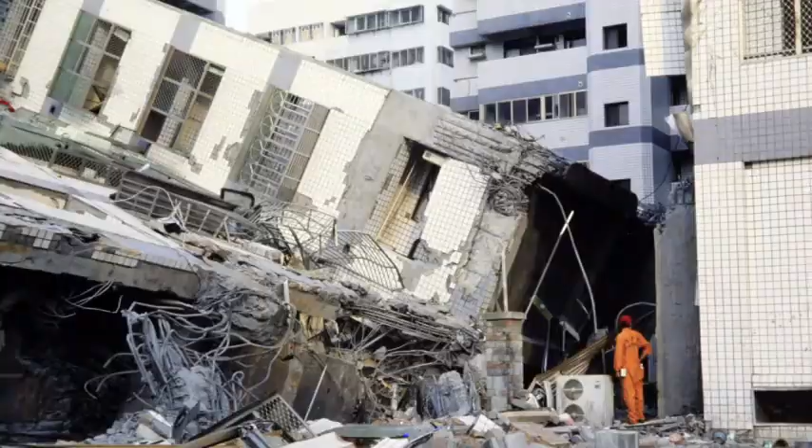While earthquakes can easily cause massive loss of life and property within a very short time, even today there is no entirely accurate way of forecasting when and where earthquakes will strike. Because of this, earthquakes can be considered random killers.

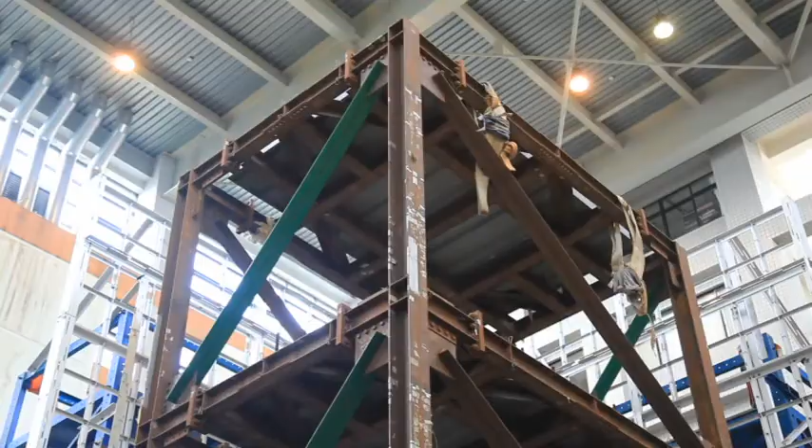Although we cannot stop earthquakes from happening, scientists and researchers are still working tirelessly in hope of making breakthroughs in forecasting earthquakes and mitigating their damage, and together help build an earthquake-proof, sustainable homeland.

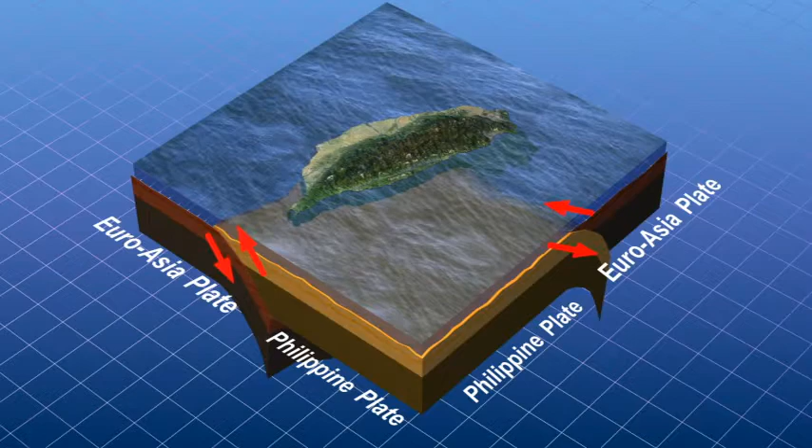Located at the junction of the Eurasian and Philippine sea plates, Taiwan is the site of intense earthquake activity. As a result, the government of Taiwan has been paying close attention to ways of alleviating loss of lives and property by preventing the destruction of buildings in earthquakes.

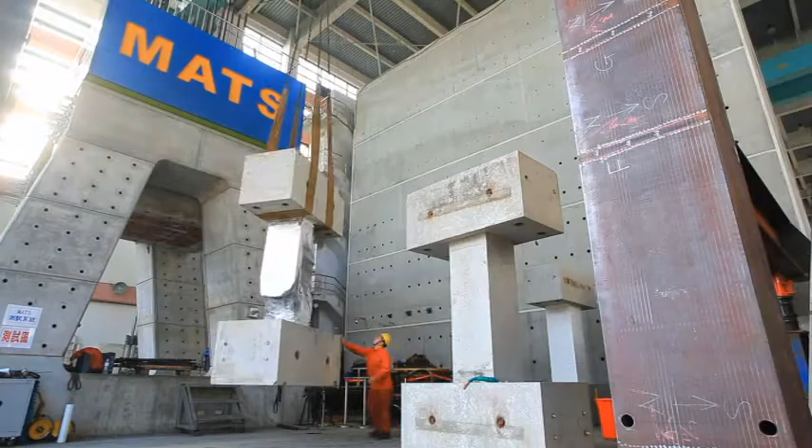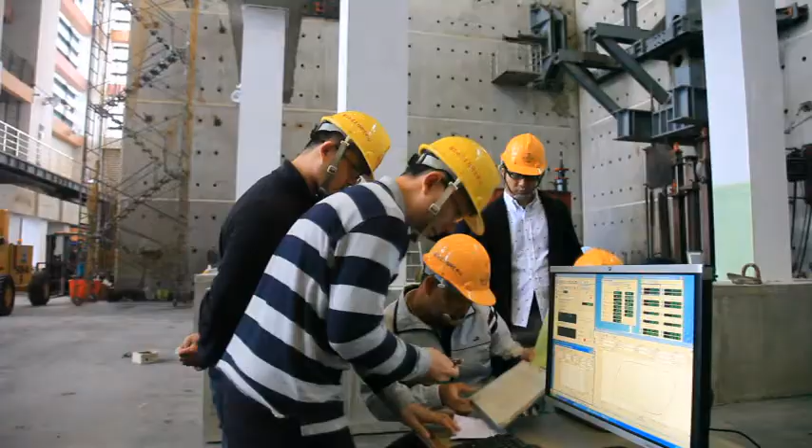In order to overcome bottlenecks in earthquake engineering research and take the domestic earthquake engineering research to the next level, the National Science Council of the Executive Yuan established the National Center for Research on Earthquake Engineering, NCREE, in 1990. Researchers at NCREE employ the results of large-scale, quasi-static and dynamic experiments to verify theory and effectively reduce the damage caused by earthquakes, safeguarding the nation's economic achievements.

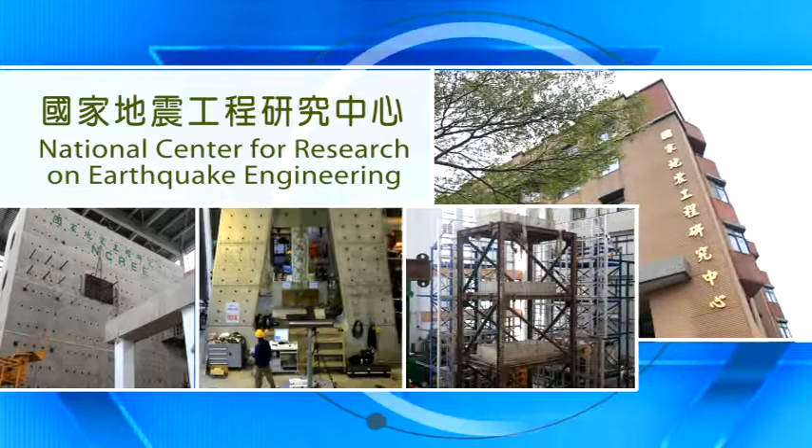The National Science Council established the National Applied Research Laboratories, NAR Labs, in June 2003 for the purpose of strengthening the operational flexibility and efficiency of the nation's research units. NAR Labs assumes control of all national laboratories, including NCREE, which has continued to carry out its crucial mission of earthquake disaster prevention in Taiwan.

NCREE's main missions currently include establishing and providing experimental facilities and earthquake engineering databases, leading the development of seismic design codes, bridging between academic and industrial sectors, playing the role of coordination and integration, leading the way for the innovation of seismic technology, and spreading and popularizing seismic knowledge.

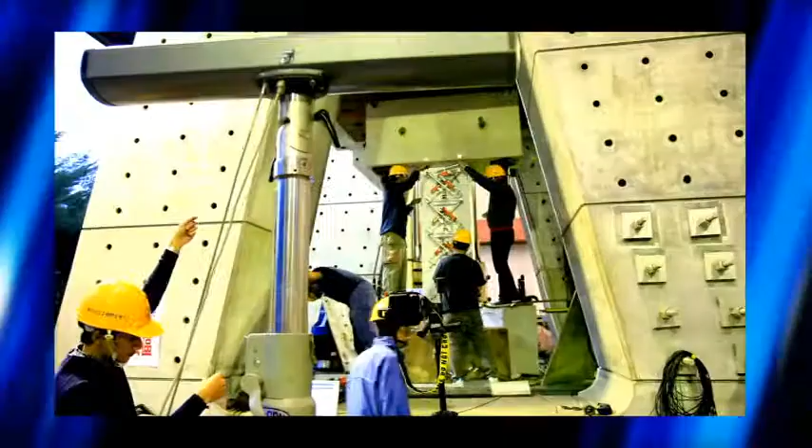In order to accomplish its missions under the leadership of the Director General and 2 Deputy Directors General, NCREE has established separate administrative support and specialized technology divisions, while also making flexible adjustments in accordance with emerging research needs so as to achieve the best effectiveness.

NCREE's Earthquake Simulation Laboratory possesses experimental facilities meeting the highest international standards, including a seismic simulation shake table, reaction wall and strong floor, and multi-axial testing system.

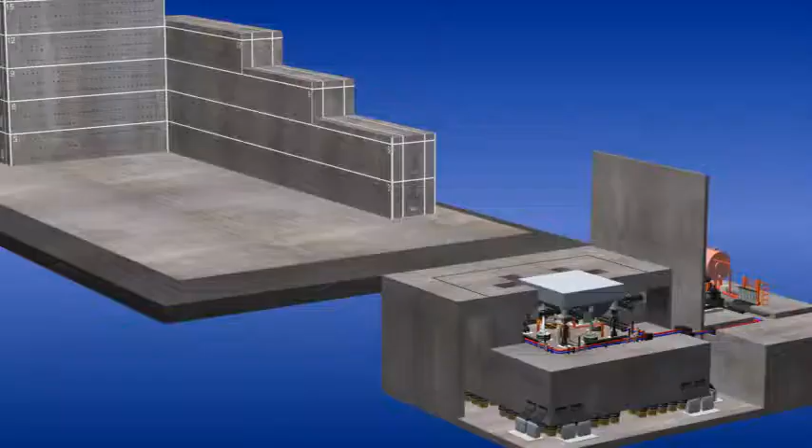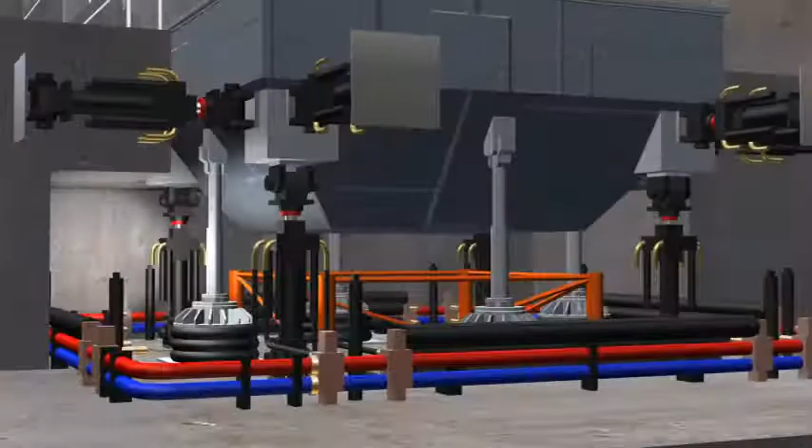Seismic Simulation Shake Table. The Seismic Simulation Shake Table has 6 degrees of freedom and can simulate major natural earthquakes as well as artificial earthquakes. With dimensions of 5 meters by 5 meters, the shake table is capable of carrying a maximum payload of 50 tons and is driven by 12 actuators along 3 axes.

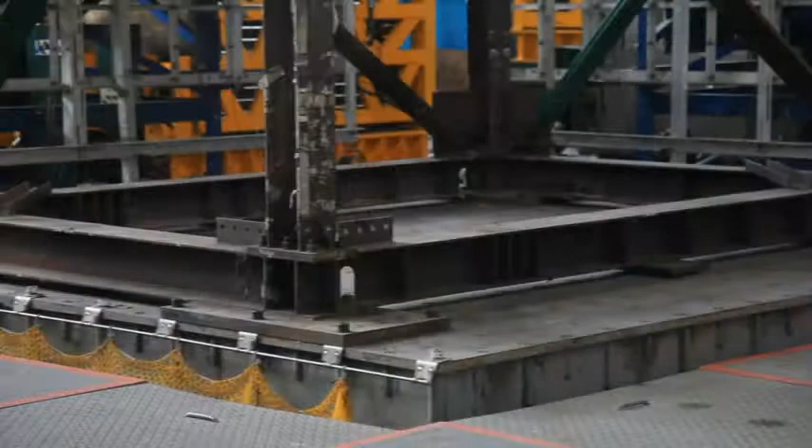The shake table is secured on a reaction mass block weighing 4,000 tons. 96 air springs and 80 viscous dampers make up the isolation system to separate the table from the laboratory foundation and keep the laboratory structure free from the shake table vibrations.

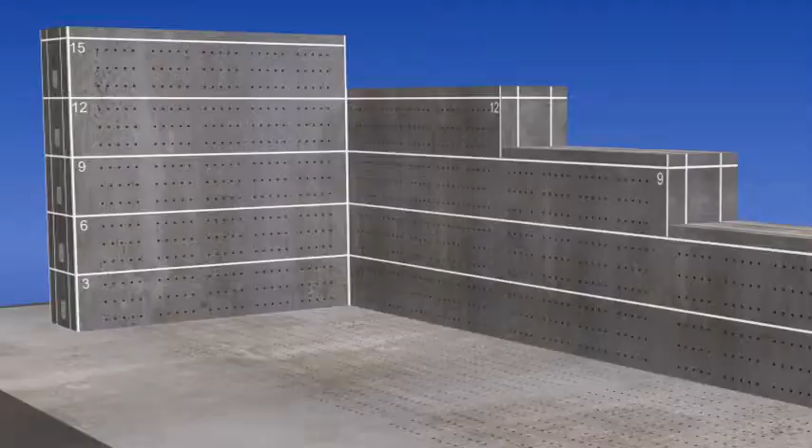Reaction wall and strong floor. The reaction wall and strong floor experimental system can perform quasi-static monotonic or cyclic loading and pseudodynamic testing of large or full-size structures. The reaction wall is used to secure the hydraulic actuators and provides the reaction needed on structural tests. L-shaped in plan view, the reaction wall system has a cell-type construction and features a unique artistic design with wall heights varying from 15 meters, 12 meters, 9 meters to 6 meters.

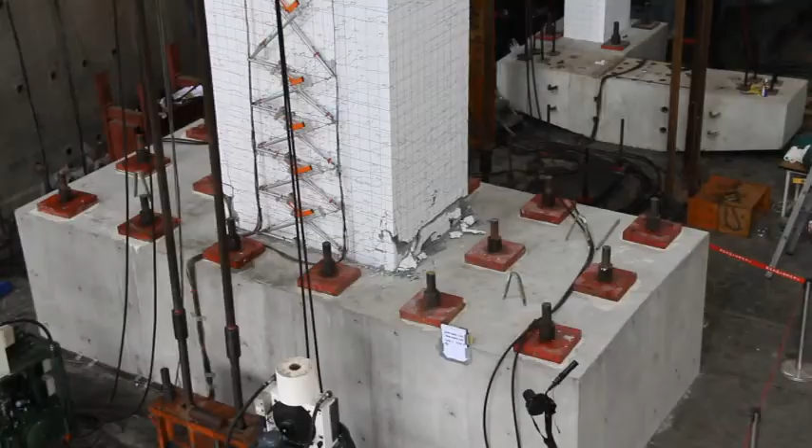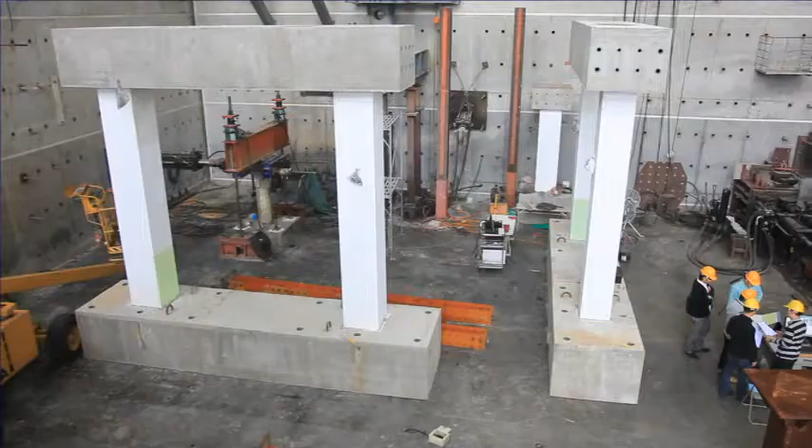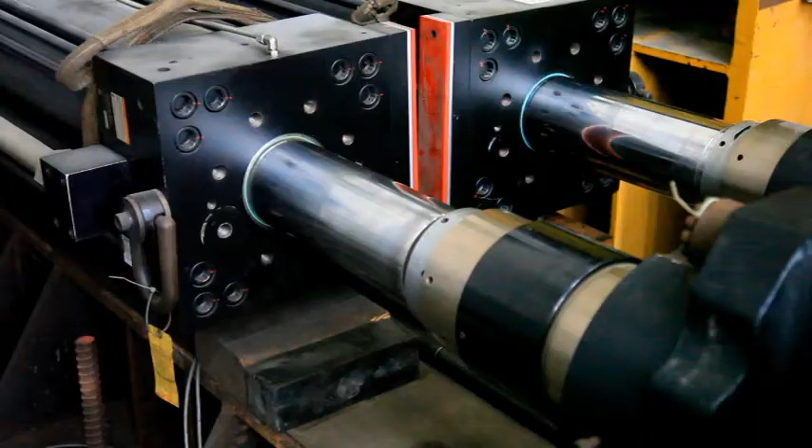The strong floor is mainly used to mount the structure specimens. It has a reinforced concrete construction and dimensions of 60 meters length, 29 meters width, and 1.2 meters thickness. In addition, a testing system for energy dissipating elements is provided to perform dynamic cyclic loading tests on energy dissipating elements. The facility is fully able to support seismic performance verification, code development, R&D of new generation technologies, and construction methods in industrial, governmental, and academic sectors.

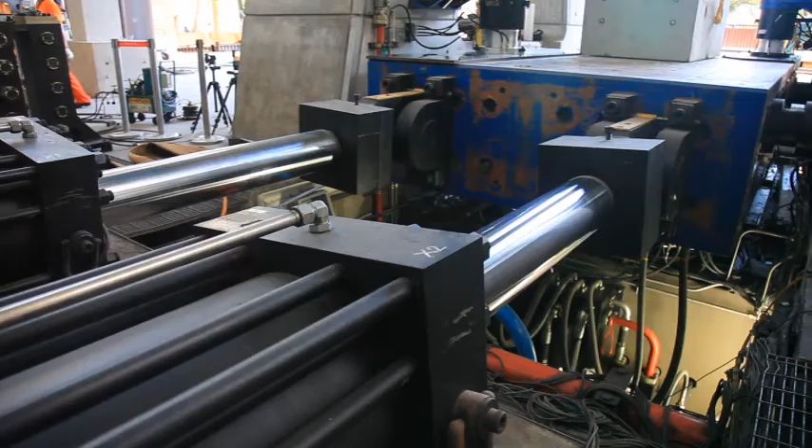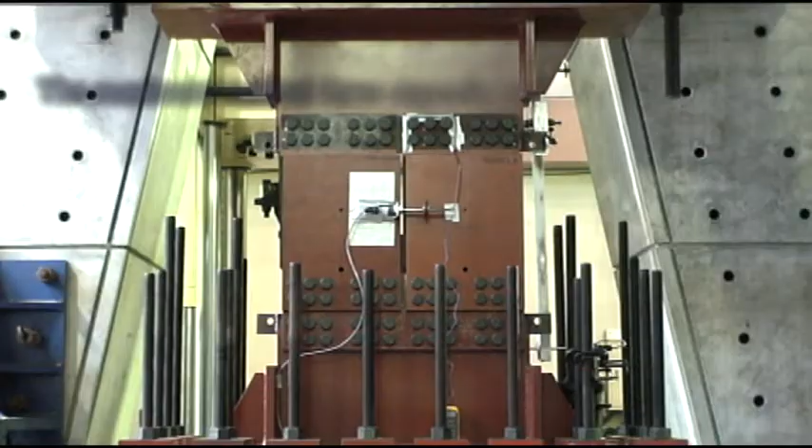Multi-axial testing system, MATS. MATS is a structural testing system with 6 degrees of freedom, capable of applying vertical loads, lateral loads, transverse loads, as well as bending moments in all 3 directions. The maximum vertical force capacity is 6,000 tons. The maximum horizontal displacement is plus or minus 1.2 meters. And the maximum horizontal tension compression force capacity is 700 tons.

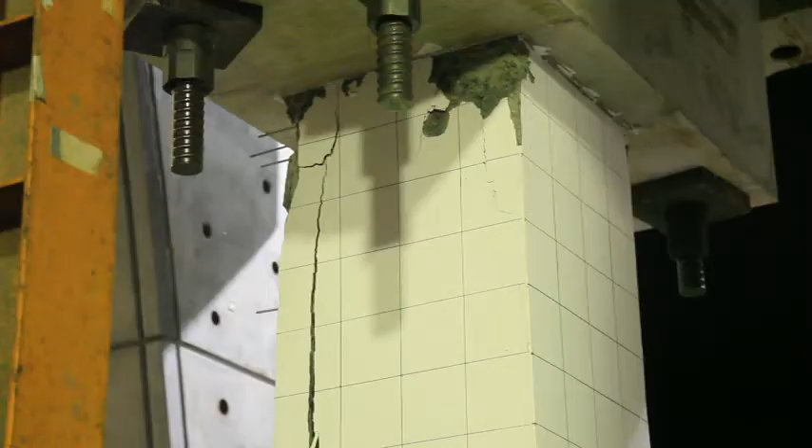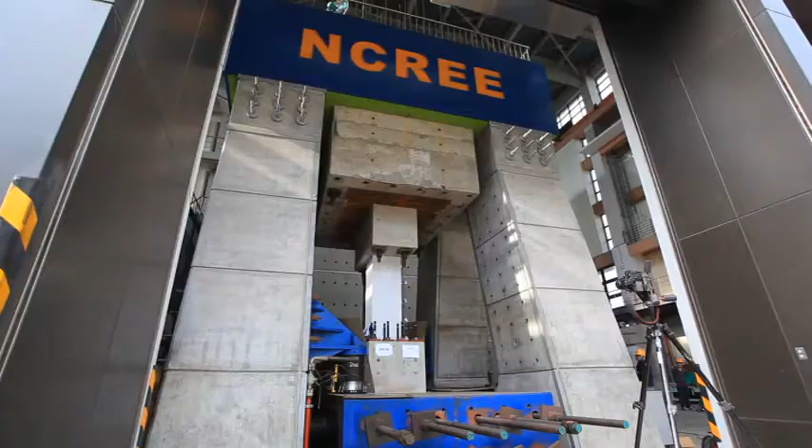In comparison with equipment used in the past, this system can simulate an even wider range of structures subject to actual forces or deformations. The system can be used to test many different types of structural elements and subassemblages. NCREE's Earthquake Simulation Laboratory and Calibration Laboratory have both passed ISO 17025 certification, and its Earthquake Simulation Laboratory has also passed ISO 9001 certification, assuring the quality of earthquake engineering experiments.

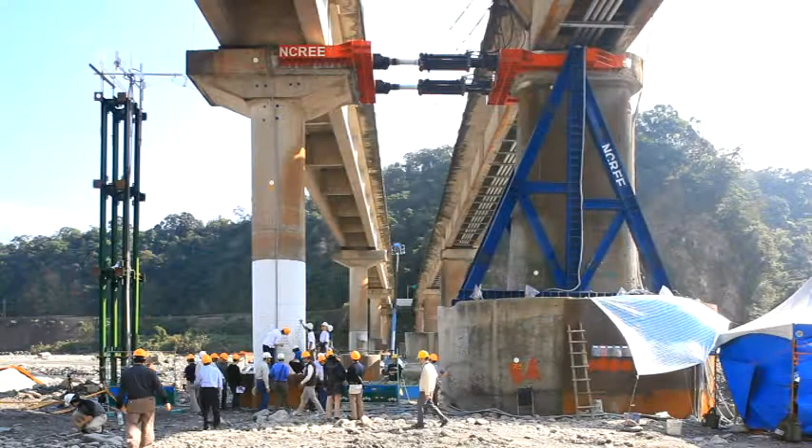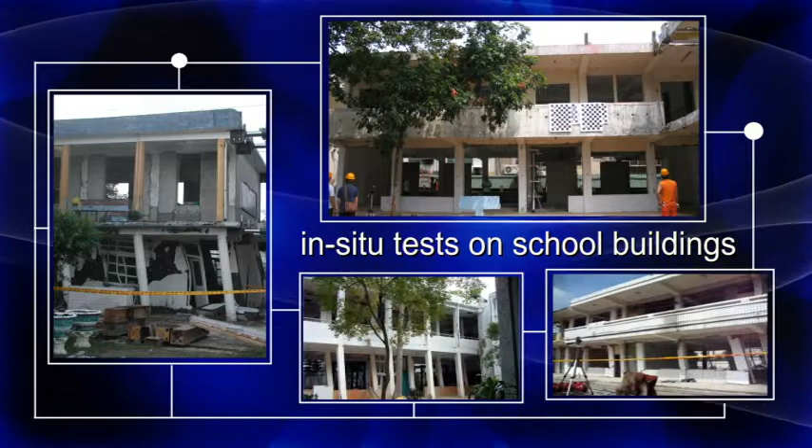After being in operation for more than 20 years, thanks to the teamwork and dedicated efforts of all employees and other earthquake engineering partners, NCREE has achieved many impressive R&D results in the following areas. In the area of seismic assessment and retrofit of existing structures, NCREE has been continuing to take the lead to perform seismic assessment of a large number of buildings and bridges in recent years, and provides a feasible portfolio of seismic retrofit recommendations. NCREE has been steadily improving the domestic structural seismic assessment and retrofit technologies through conducting a variety of advanced structural experiments, particularly in situ full-scale tests of elementary and middle school buildings and bridges.

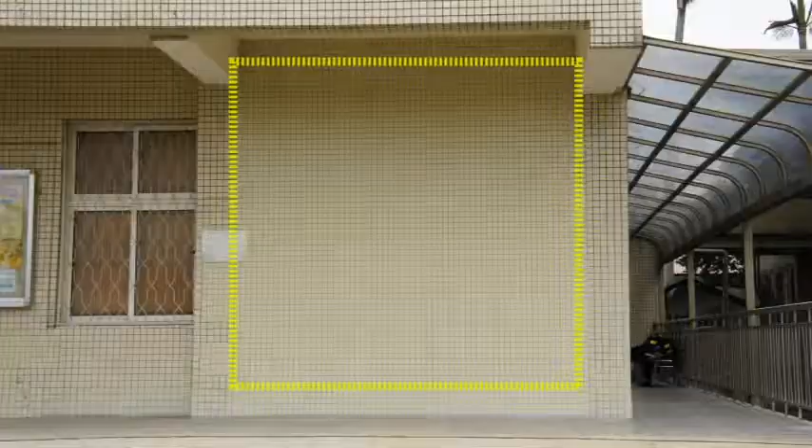The School Building Seismic Design and Retrofit Project, spearheaded by NCREE's Building Division, has brought about a major improvement in Taiwan's school building seismic resistance capabilities and holds educational training classes and workshops in order to enhance the professional skills of relevant personnel. The outstanding performance of this project was recognized by the Executive Yuan with the 2011 Award for Outstanding Contributions in Science and Technologies.

In the area of seismic design codes, NCREE helps government agencies such as the Ministry of Transportation and Communications and the Ministry of the Interior to draft various types of seismic design codes in line with the principles of feasibility, efficiency, and safety. NCREE also regularly convenes its Codes and Standards Committee to review relevant issues and submit recommended revisions, while also performing research on the next generation of performance-based seismic design codes.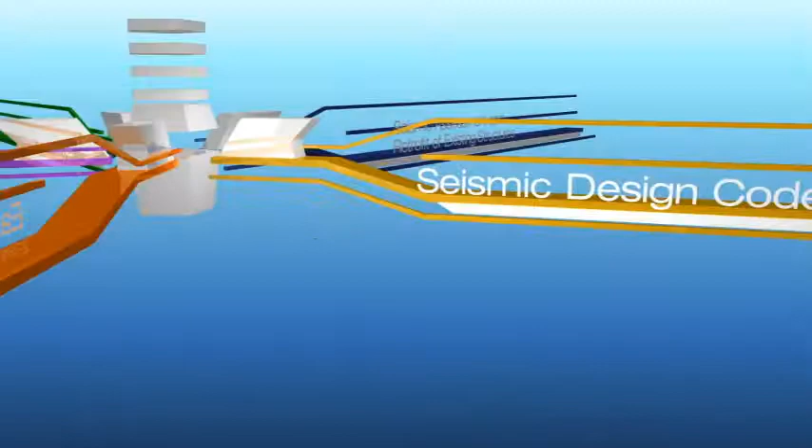In the area of earthquake risk assessment, in addition to compilation of a comprehensive earthquake engineering database, NCREE has also integrated various earthquake damage loss assessment models and parameters to develop the Taiwan Earthquake Loss Estimation System, TELES, which can estimate probable earthquake damage to various civil structures and industrial facilities.

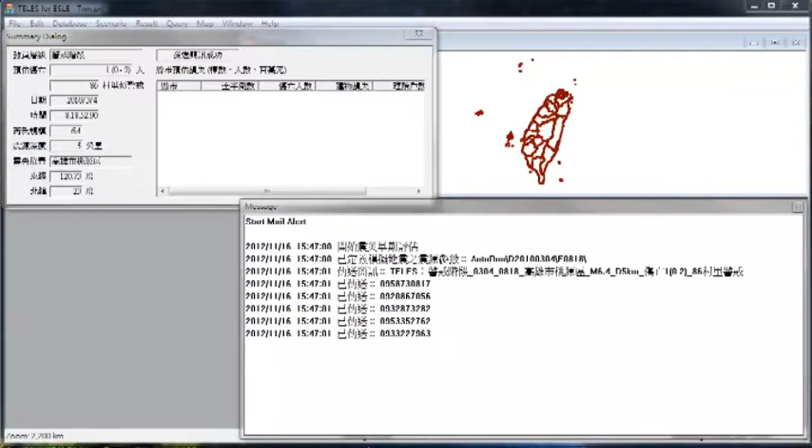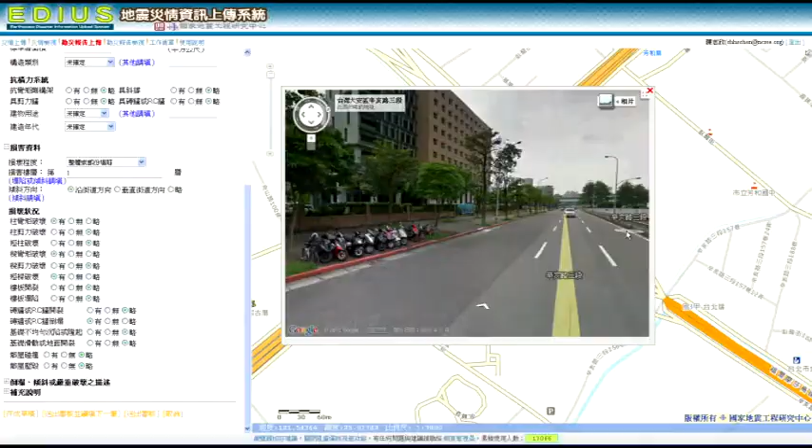The system's early seismic loss estimation module can use cell phone text messages, email, or website query information to notify relevant personnel of the scale and distribution of possible earthquake damage within 1 to 5 minutes after an earthquake occurs, providing critical information needed to guide preliminary earthquake emergency response actions.

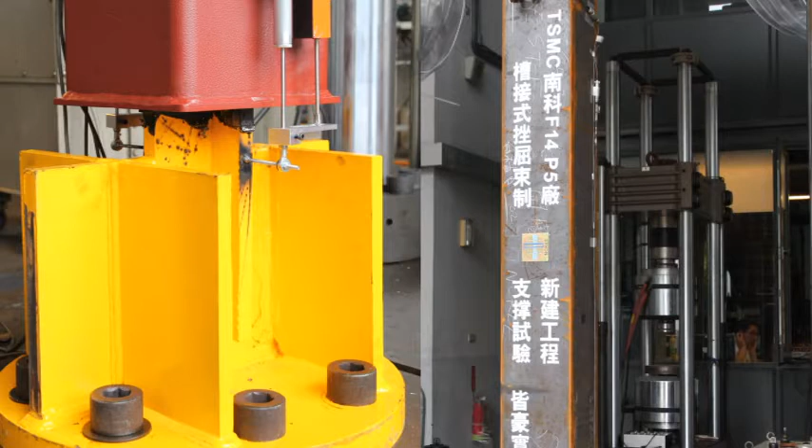In the area of new technologies and construction methods, experiment results and system development. End-slot buckling restrained brace, BRB. Buckling restrained braces are highly economical, high-performance damping devices that can dramatically reduce the swaying of buildings via the dissipation of seismic energy. The welded end-slot buckling restrained brace, developed at NCREE, is easy to manufacture and install. It is already in widespread use in buildings throughout

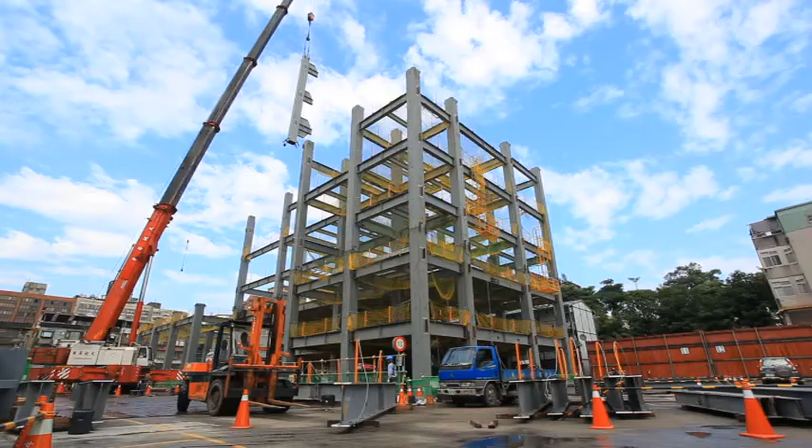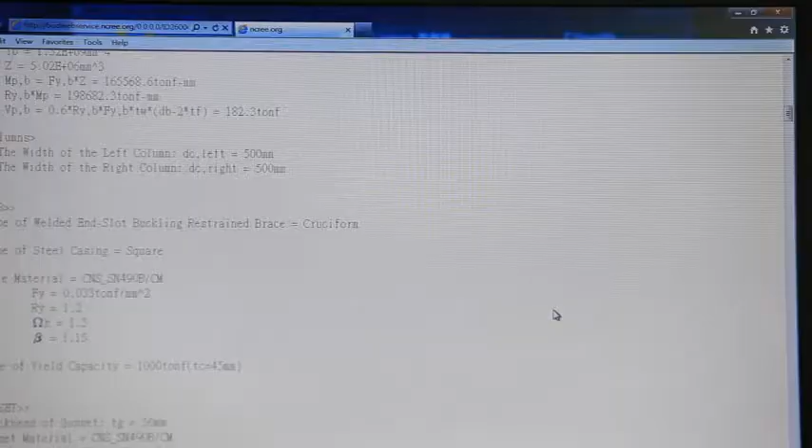Taiwan. In addition, engineers can use the Brace on Demand (BOD) software developed at NCREE to perform automated design and inspection work via cloud computing and dynamically produce structural calculation documents and statements, enhancing the quality and quantity of design works.

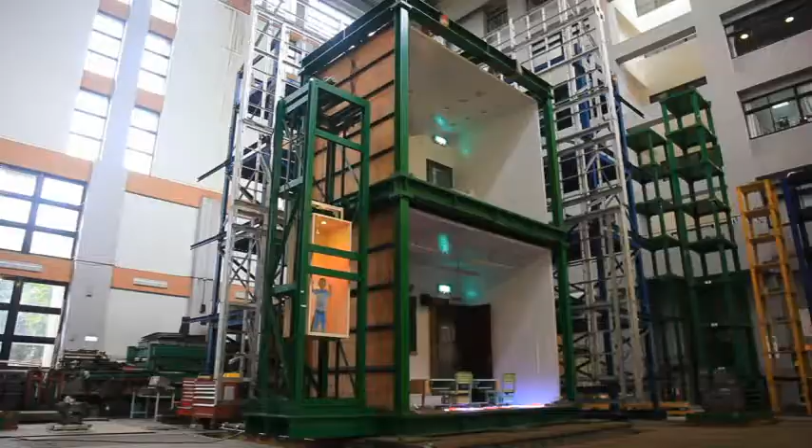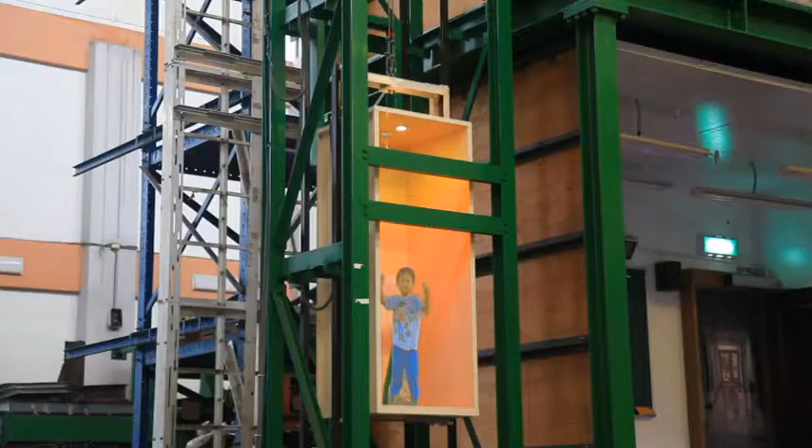On-Site Earthquake Early Warning System (EEWS). This system can provide early warning of earthquakes before they can be felt. The system can be combined with an intelligent control system to automatically shut off gas lines, stop elevators, open up emergency exit doors, and turn on LED escape guidance lights while issuing the warning.

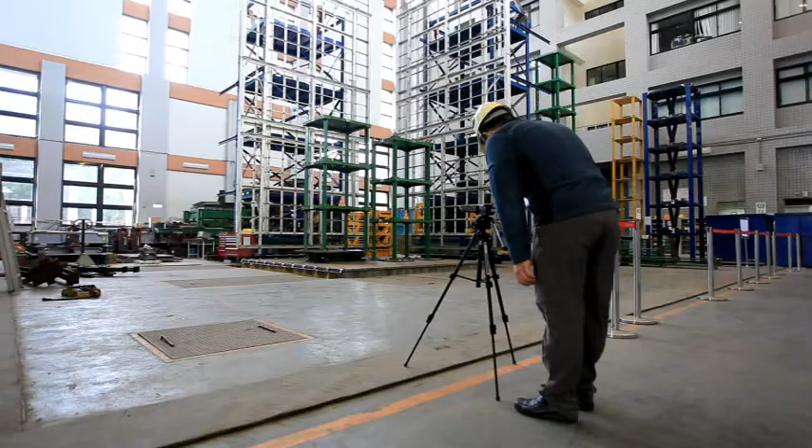Multi-roller bearing seismic isolator. This device can effectively reduce the transmission of seismic forces to equipment or facilities sitting on top of it while maintaining a stable response through the use of an excellent seismic isolation mechanism and self-centering capability.

Innovative construction methods and applications. Precast segmental post-tensioned concrete bridge columns. This working method involves the use of precast concrete segments, which can be stacked to form bridge piers. This method can dramatically reduce the impact of construction work on the environment and traffic, and has been widely deployed in the construction of elevated highway along Line 74 in the Taichung metropolitan area.

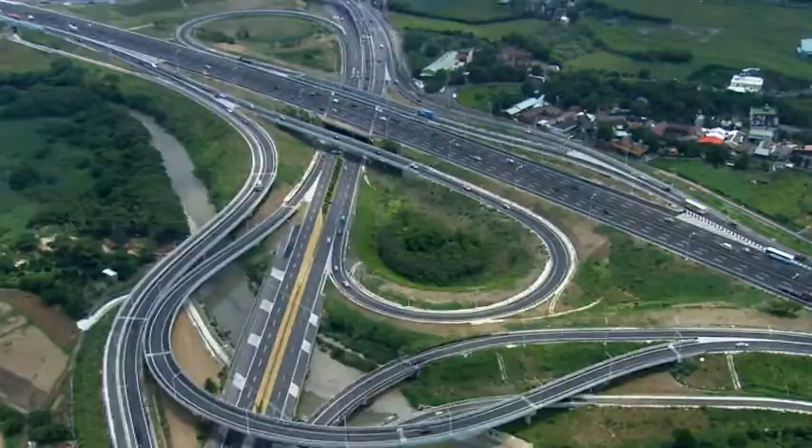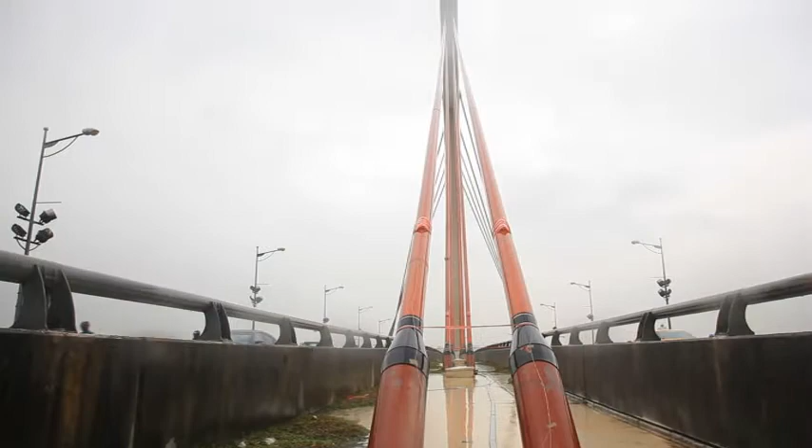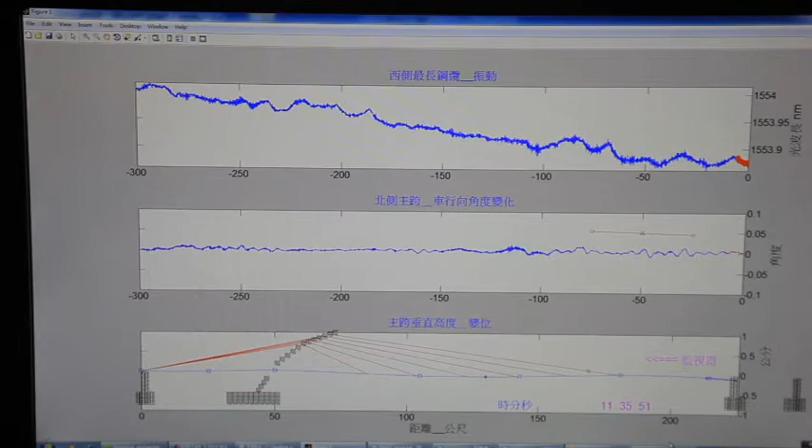Bridge monitoring. Fiber optic entire bridge monitoring system. This technology employs fiber optic cables and sensors to simultaneously monitor river water level, bridge deck condition, bridge pier elevations, and bridge cable tensions. The technology is already in use at many bridges in Taiwan. As soon as any unusual problem happens to the bridge, its monitoring system will promptly notify managers, allowing damage to be contained.

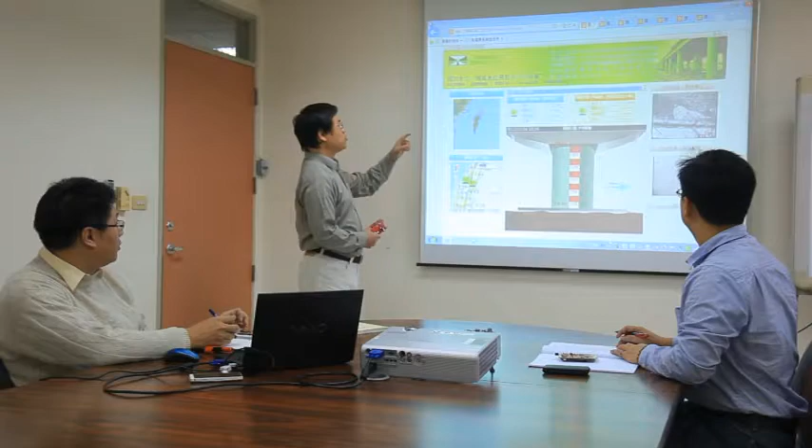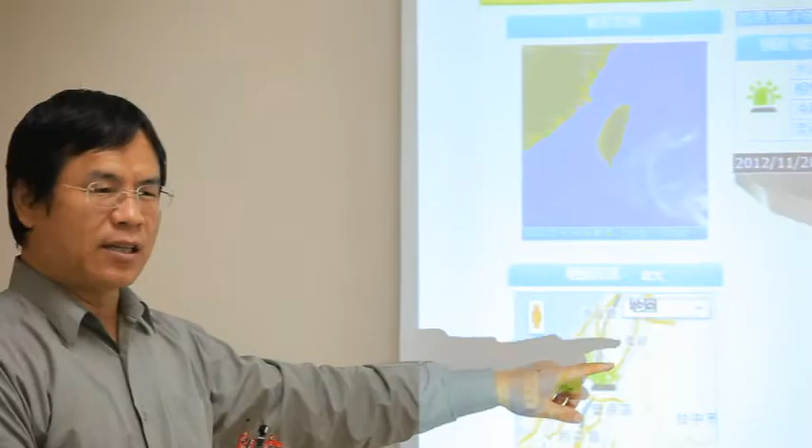Bridge scouring warning system. This system can monitor bridge scouring in real time, provide automatic early warnings, and report accurate bridge condition to decision makers while typhoons or floods are occurring. The system has passed hydraulic simulation tests in the laboratory and is undergoing on-site reliability testing on the Highway Number 1 and Number 3 bridges over the Dajia River, the Shuangyuan Bridge, and the Zhongsha Bridge.

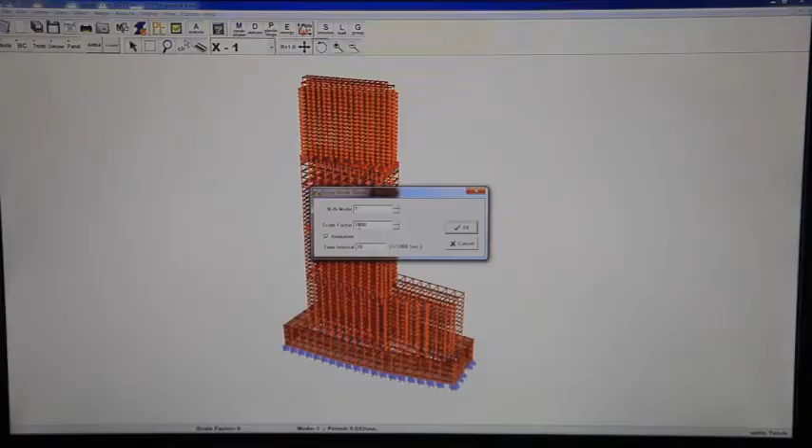Analysis software development. PISA 3D. The new generation PISA 3D structural analysis software can accurately predict building responses under earthquake excitation. Compared with other software in the same class, the PISA 3D software can save up to 90% of the computational time needed for numerical analysis, and its 3D graphical visualization interface provides its users a convenient and faster operation platform.

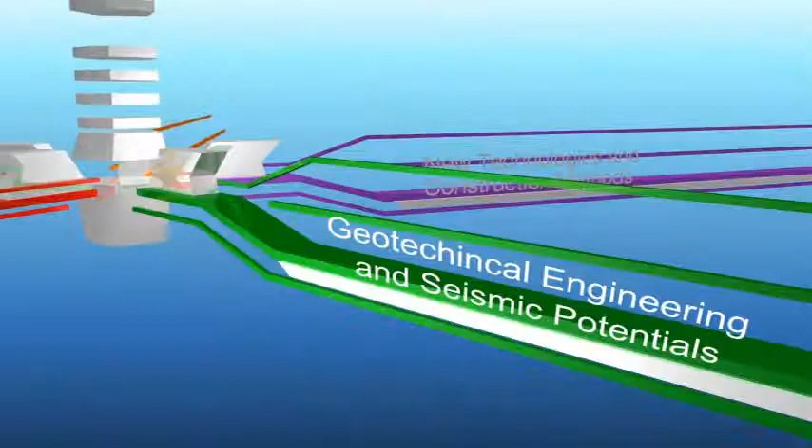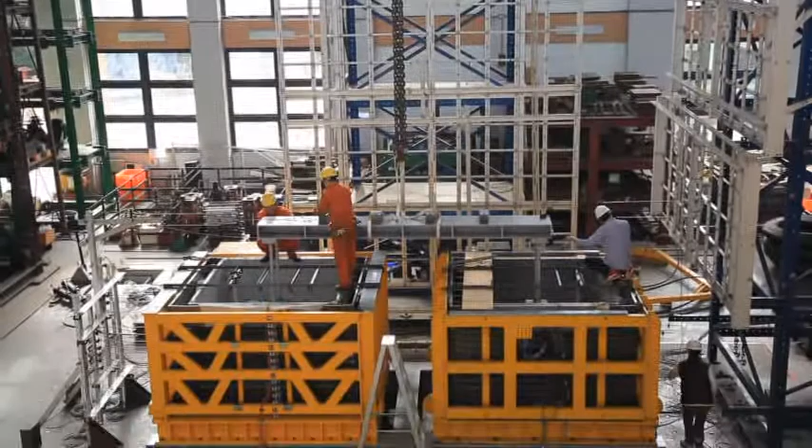In the area of geotechnical engineering and seismic potentials, since soil liquefaction induced by earthquakes can cause tremendous damage to civil structures, NCREE has performed shaking table experiments involving a bidirectional soil shear box to gain a better understanding of the interaction between structure and its surrounding soil. The results of this work can be helpful for disaster mitigation in the event of an earthquake.

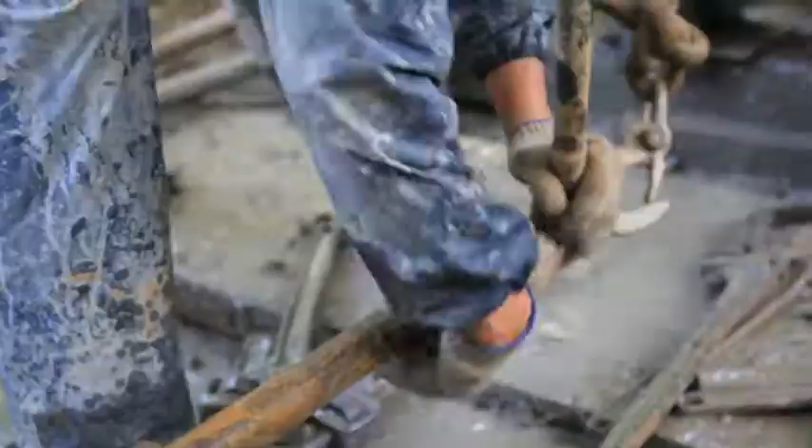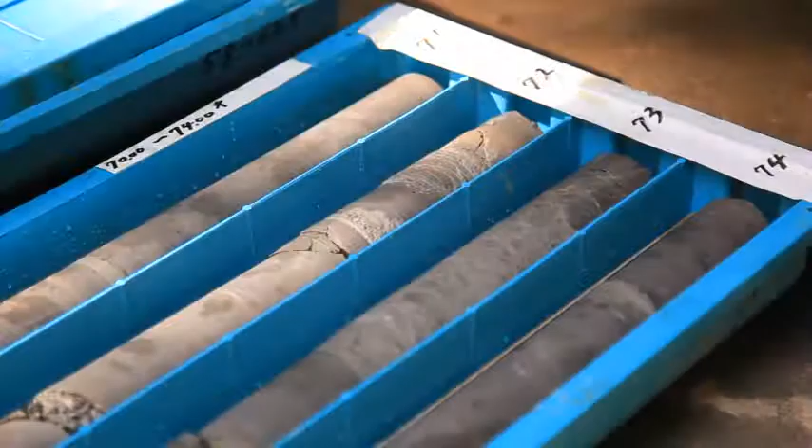Furthermore, NCREE is collaborating with the Central Weather Bureau in taking geological core samples from the locations of monitoring stations in Taiwan's strong motion network and establishing an engineering geology database. NCREE has further performed seismic and geochemical monitoring on selected major faults in an effort to assess possible earthquake potentials and obtain supporting information to guide seismic design and deployment of regional earthquake early warning systems.

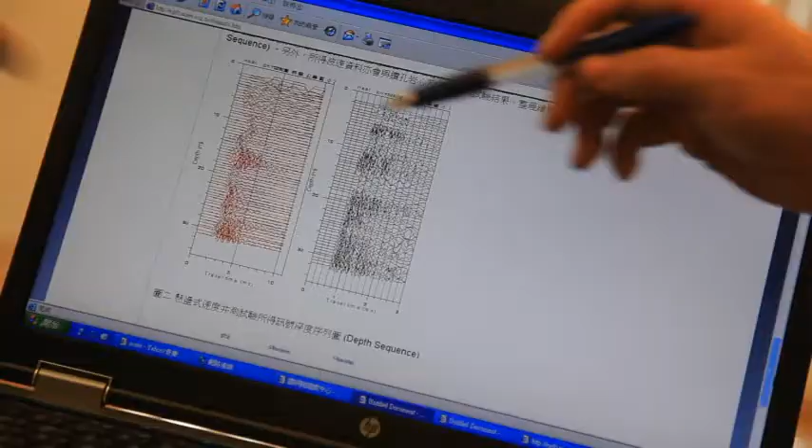Promotion, education and extension activities. NCREE is a member of the Asian Pacific Network of Centers for Earthquake Engineering Research, ANCER, and has cooperation or research agreements with seismic research institutes in the European Union, Canada, the United States, Japan, and Britain. To date, NCREE has held many sessions of the International Training Program for Seismic Design of Structures, which is geared to help developing countries to upgrade their structural seismic design technology.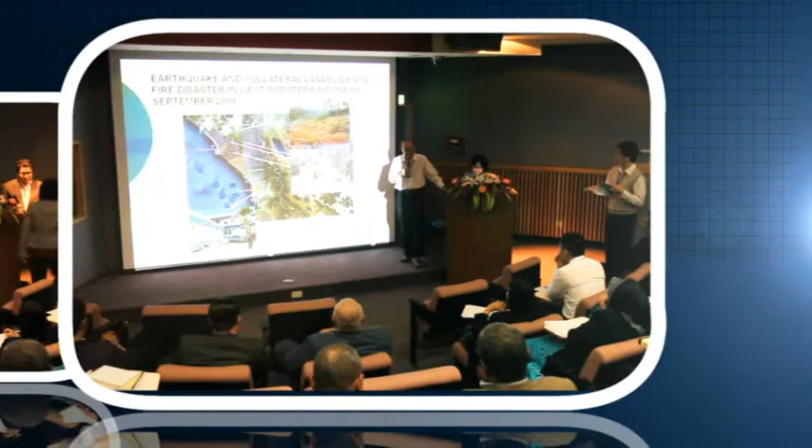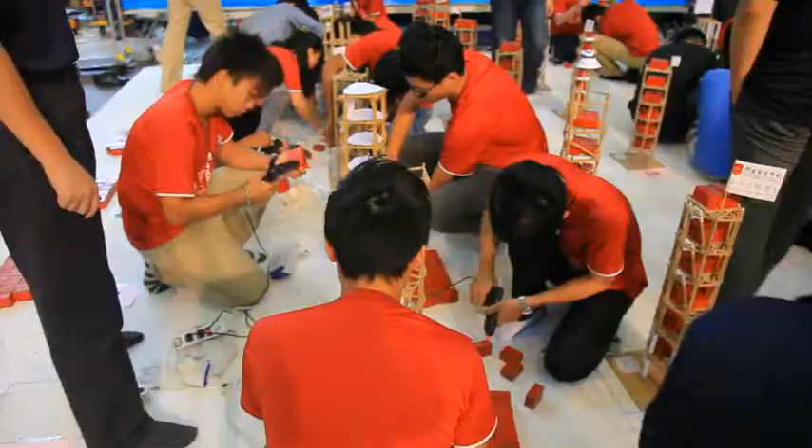NCREE also relies on international conferences, domestic symposia, and the publication of research papers to help increase Taiwan's contributions to the international earthquake engineering community. Furthermore, NCREE has conducted numerous educational extension activities, including Earthquake Week and introducing and demonstrating earthquake engineering research in schools, and seismic design contests. These fun and educational activities have increased public awareness of earthquake resistance and damage prevention concepts.

In recent years, the focus of earthquake engineering research at NCREE has evolved from the basic requirement of structural integrity in major earthquakes, no damage in minor earthquakes, to strengthening the nation's ability to fast recover from earthquakes. In line with contemporary trends, NCREE is pursuing 3 major R&D directions and training domestic research manpower as it strives to build an earthquake-proof, sustainable homeland.